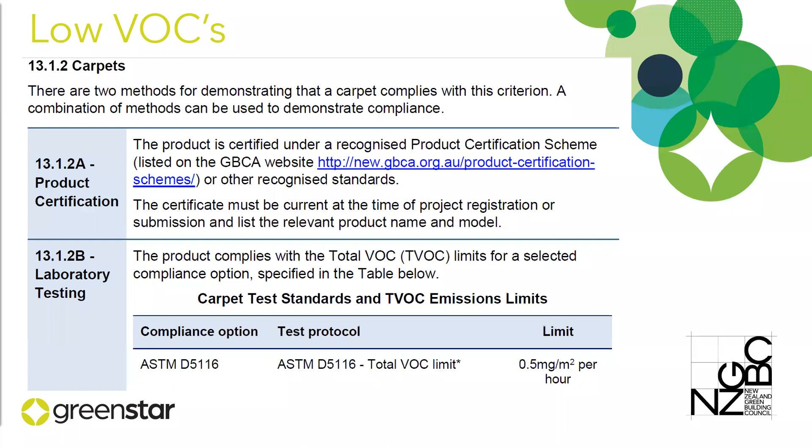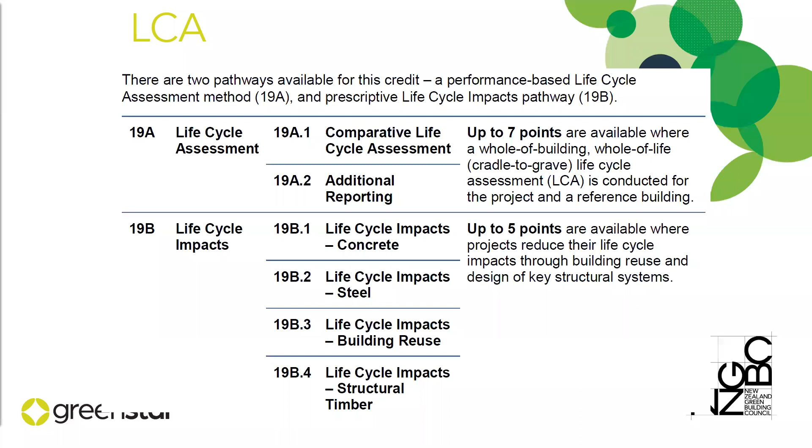So there's also responsible building materials. Once again, not going to get too much detail here. Alex, maybe if you want later, you could talk more about it. But I will talk about the next slide.

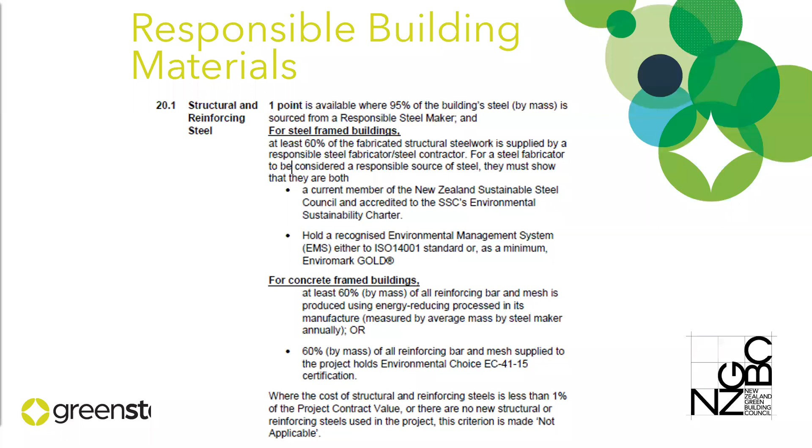And then we also have, for PVC, that if you have PVC it meets the GBCA's best practice guidelines for PVC. We're not going to get into detail on that one today, but that's a standard you have to follow if you have PVC products if you want to get this point.

So basically the other way you can use credits is if you've got a material that will work in our tool, such as insulation, cladding, glazing, stud types, linings affecting thermal performance and moisture control, heating systems which affect energy and emissions related to credits in both Homestar and Green Star. So that's it for me.

And next is off to Dani. Hey everyone. All right, so with materials, there are two credits in Homestar that look at materials. Could you please click, Isabel? All of it, yeah. And the first one is MAT 1, which deals with sustainable sourcing.

Then MAT 2 deals with VOC limits. And in terms of what we look at and what ecolabels and certifications are acceptable, the requirements are basically the same as Green Star, so I'm not going to double up on what Brad has said. However, we do have some additional things that we recognize.

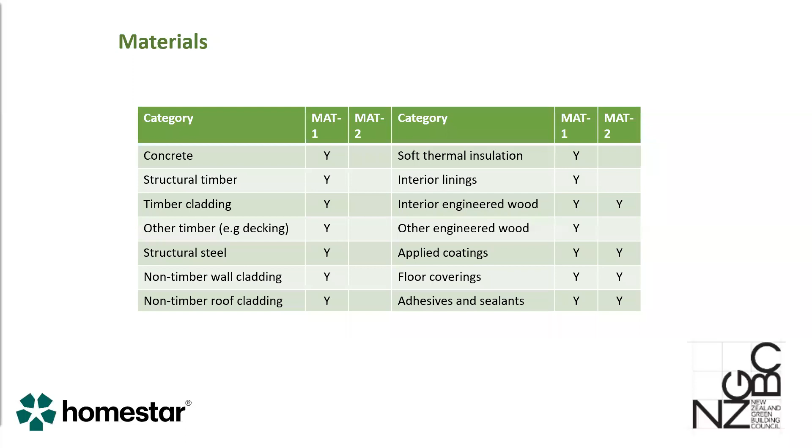And the reason why we do that is because for any material product category, to get any points, you need to have at least 50% of the total products used in that category qualifying for the points you're claiming through the pathway you want to claim them through, which is why they all need to be consistently calculated and measured. That's why we have multiple timber categories, for example. In terms of these pathways, as you can see, it's quite similar to Green Star.

We have ecolabels. Environmental Choice, which is a type 1 eco-label, gets you 2 points - that's the maximum points available in that category.

Green Tag has multiple levels, so you can get 1, 1.5, or 2 points based on if it's Green Tag C, B, or A. Maximum points for A.

Similarly, the Carpet Institute's ECS has 4 levels - we recognize levels 2 to 4 - and Good Environmental Choice Australia, or GECA, Smart, etc. We also recognize FSC and PEFC, and they both get full points, depending if you qualify for them.

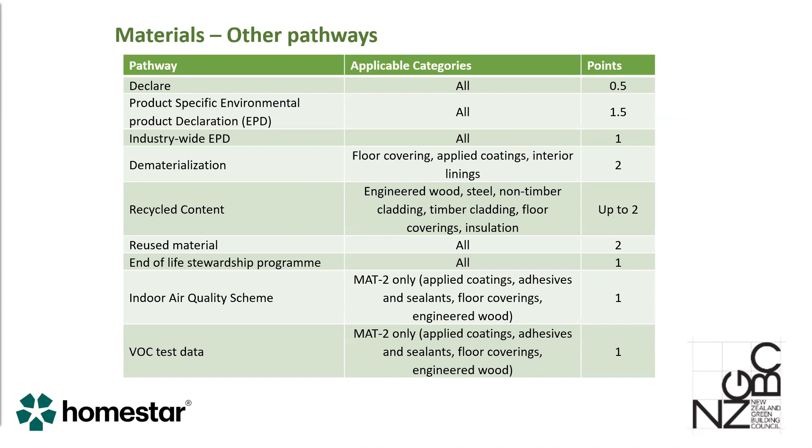Now, in terms of how to prove that you qualify for these points and how to claim points - this is very important. With any Homestar submission, we need to see 2 things: firstly, what's being provided, and secondly, that whatever is being provided qualifies for the points you're getting.

So things we accept would be receipts, quotes, photos. In order to show what's used in the project, you can use receipts, quotes, photos of a product on site. For design rating, we also accept specifications that require a certain product.

And then on the other side, to prove that those products used in the project qualify for the points you're claiming, you need to show photos of certifications, maybe on labeling. For example, if you get a bucket of paint with ECNZ, there's a big tick on top, so we accept that.

A photo or screenshot of a certification database section where you can see that product is listed - that's probably the best one, because it's the most reliable and generally the easiest to find. If you know the product has Green Tag or ECNZ or ECS level 4 for a carpet, you can go on their websites and they have all the certified products in a database, and you can show that the specific product, not just the brand, has the certification.

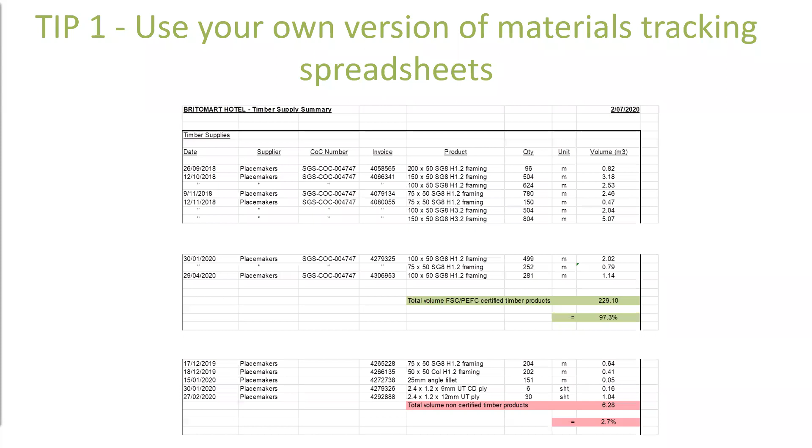So that's a really good tip. And again, it looks scary now, but this has been building up for 18 months. At the beginning, there was 2 or 3 folders. So don't leave that to last, which is going to be basically my tip number 5. Don't leave that till the end, because you're going to look like this.

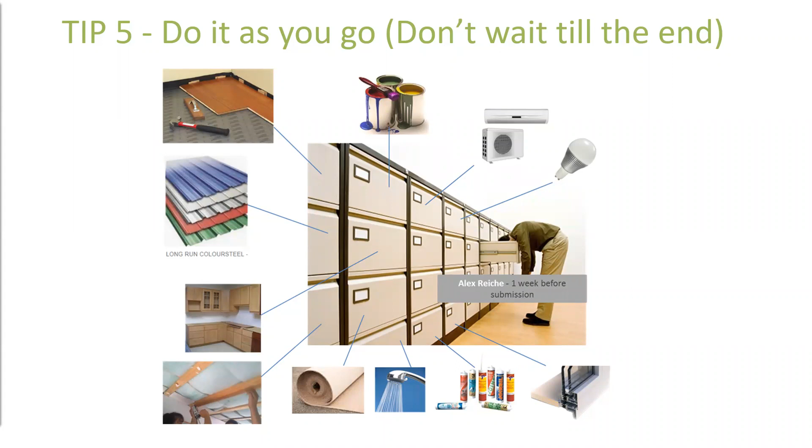But coming back to tip number 3, go on site and take your material credits spreadsheets, or whatever the level of compliance you're aiming for, and just walk around site. So if you've got a spreadsheet for your paints and you've got lots of resin, wallboard sealer and interior paints and exterior cladding paints, but you go in and there's large steel columns which are painted, then take a step back and think, wait a minute, is that on my spreadsheet?

This is intumescent paint, probably fire rated. It's not going to be compliant, so you need that entry on there. So just by going and having a visual of the building with your product and material credits in mind, it probably just helps you ensure what you need to have in those spreadsheets and those data entries is there.

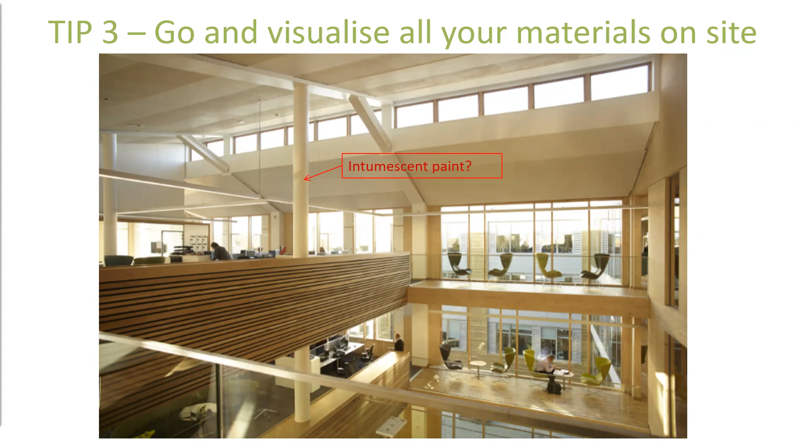And there's other examples. We get declarations from painters, and there's 210 square meters of wall to be painted, and the declaration says I've used this paint, and there's only one paint on there with a 10-litre bucket written down. It's like, well, you've not painted 210 square meters of wall with one bucket. So always check what you're given. Don't just take it from the supplier and put it in your submission folder without checking, because it's probably 50% of the time or 40% of the time going to come back to you saying this doesn't match up.

So do it when you receive it, have a quick look, check that it's right. If it's good, stick it in your submission folder, stick that email into your email folder which matches the submission folder, and move on. That was 5 minutes of your time, but when you need to come back to it 6 or 8 months later, you'll be glad you've done that. So that's sort of just tips for organization. I nearly consider that the easy bit.

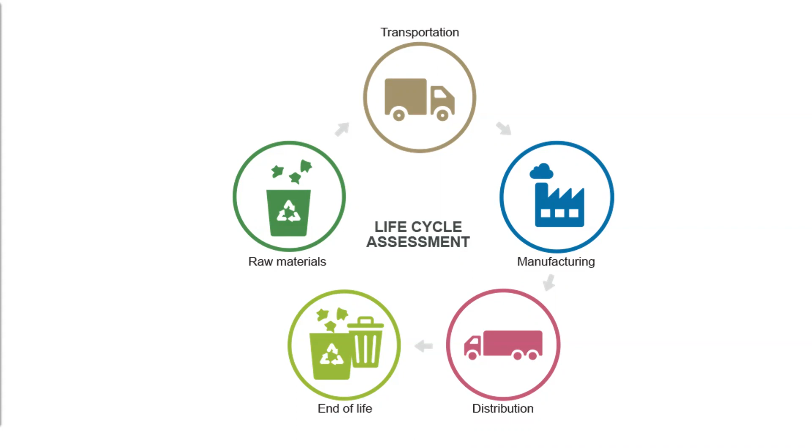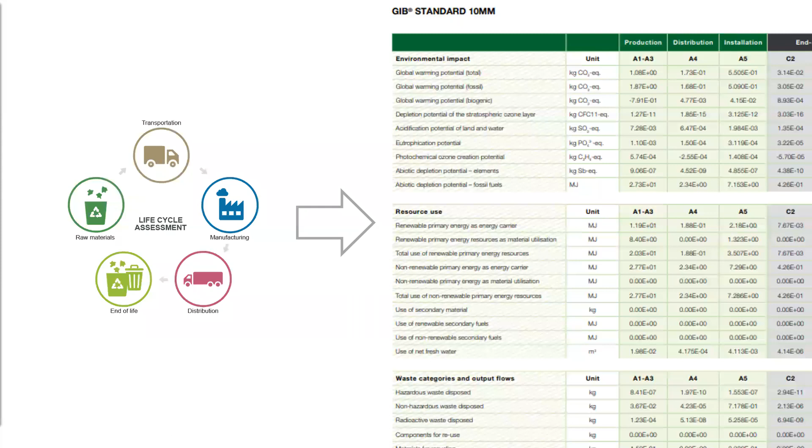So here's an example, GIB 10 mil GIB. Here is an extract of one of the tables of the LCA impacts, and it's not even the whole table. Now, what the hell am I supposed to do with this? It's just too much information. For scientists or people who've got a 3-month research program to compare a bunch of products, this will be great, you really can dive into great depth. But for someone who's got a bunch of decisions to make yesterday, this is not really providing that instant feedback that we probably need.

And it potentially gets a little bit worse. So you're comparing environmental product declarations, and there's different scope and boundaries that these product suppliers may have chosen. So here's the example, I'm looking at an office chair, and I need to find the one with the best environmental impact.

Supplier A has done an LCA and an EPD that looks at 1 unit of seating ready to leave the factory gate, so that's cradle to gate, which is accepted by Green Star. But the other one might have done an LCA based on 1 unit of seating produced, manufactured, used for 10 years, and then disposed of, so that's cradle to grave. Long story short, what you get now is a bunch of tables that are complicated like this, and you can't even compare them anymore. It's not apples for apples because it's different units, different boundaries, and different scopes.

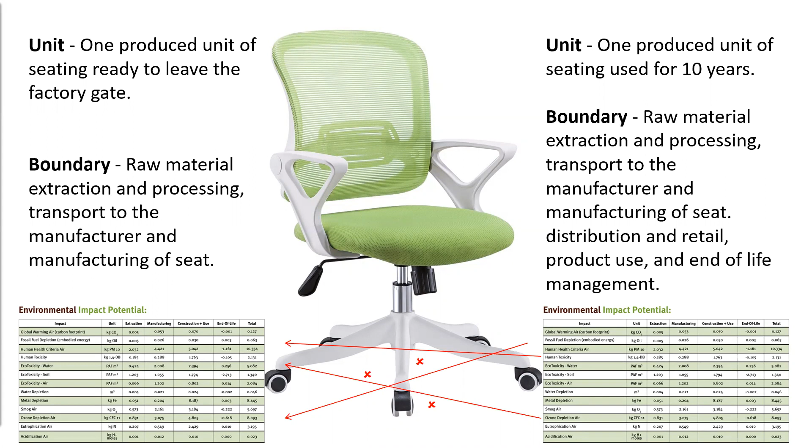So be careful when you read these things. Have a think about that unit, boundary, and scope definition, especially if you are using that to choose between 2 products.

Environmental eco-labels and certification programs tend to be a bit easier and a bit more transparent. As Dani said, you go on the website, download the list of compliant products, and you can generally print a certificate. However, something I came across which I thought I'd share with you guys, which is interesting, is Green Tag, which is an absolutely recognized eco-label.

I came across this carpet product, which is used in New Zealand, and we were trying to claim points. On the main predominant Green Tag website in Australia, it said under recertification. Then I called up, asked how long for the certificate to come, and then a bit more Googling, and I end up on a Green Tag website with this same product and with this certificate available on the right. Now I'm wondering, why is there a certificate available when it says under recertification? And then I dive a bit deeper, and Green Tag have got an arm in South Africa.

If you look at that certificate on the right and really dive into it, you can see the words Green Star SA, Green Star South Africa, and interior V1 credits only, so the IEQ credits, the VOC. This is not valid for Green Star Australia or Green Star New Zealand. So they had to go through this conversion process and update it eventually on the Green Tag Australia website. Just be a little bit aware, I guess, particularly with Green Tag, when you download certificates, read the contents of the certificate, make sure you've got the right one for the right country, and then use that.